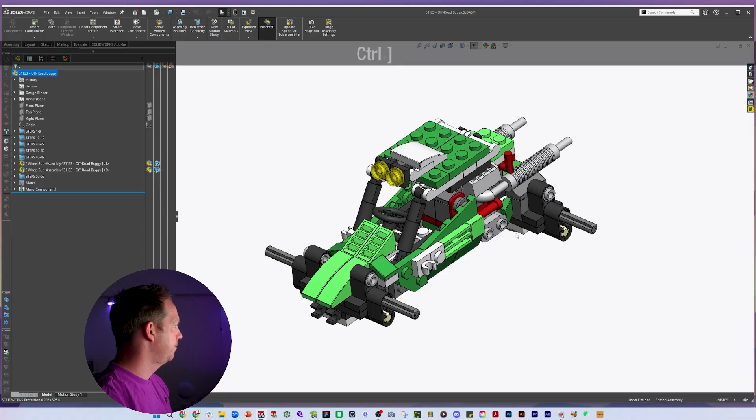We have a rear wing to build. The first one is a new part. So we've got this part here, and we're going to save that as a 1x6 instead of the 1x2.

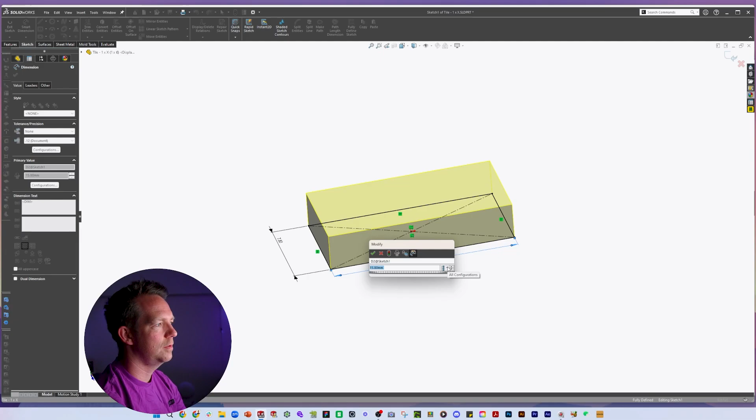Yeah, nice, that works. The only detail we need that we don't already have on this part is the little pinholes on the bottom. They are 3.2 with a slight hole on the inside, and they have spacing for 5 of them.

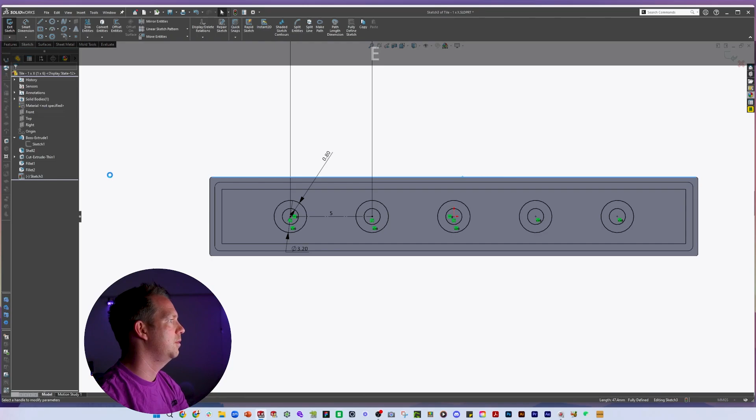We're not going to set up the full configuration for this part, just what we need. If we need to make different sizes of this tile, that's when we'll come back and change some configurations. For now, the 1x2 remains without dots, but the 1x6 does have them. And then that part's done.

We can introduce a 1x, and that has that current configuration there. That one's done. Next file.

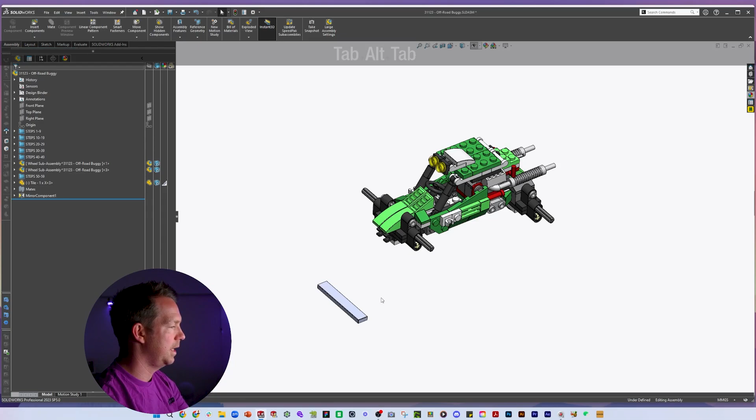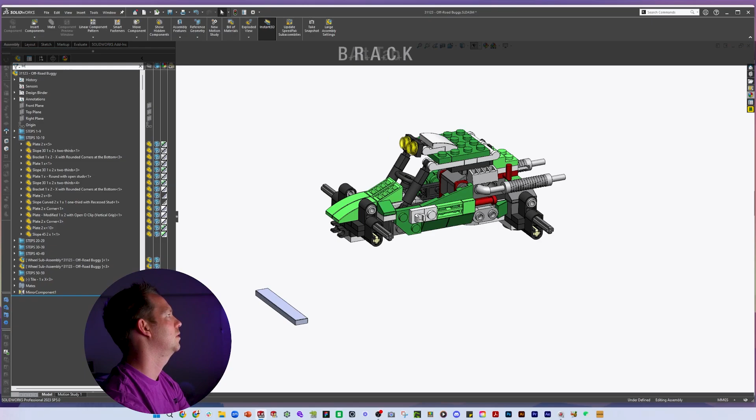Let's find it. Let's look at our parts list again - what was it called, bracket 1x2. We can use a filter and look at bracket to see what shows up, and these are the parts that we've made that are called brackets. The closest one we have is this one here.

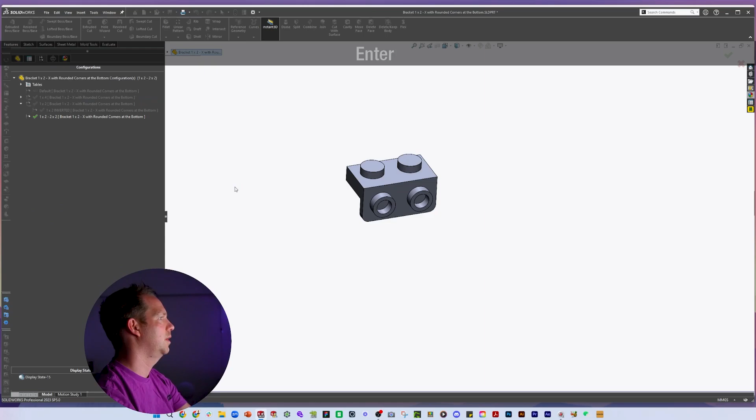So if we open that one up, this is a bracket 1x2 with a 2x2 configuration. We're going to add another configuration, 1x2-2x2, and go okay. This will be an interesting little modification.

So we will change this sketch to plus 7.8 for this size only. Now it retains the fillet, so there's no difference there, but these holes change as well.

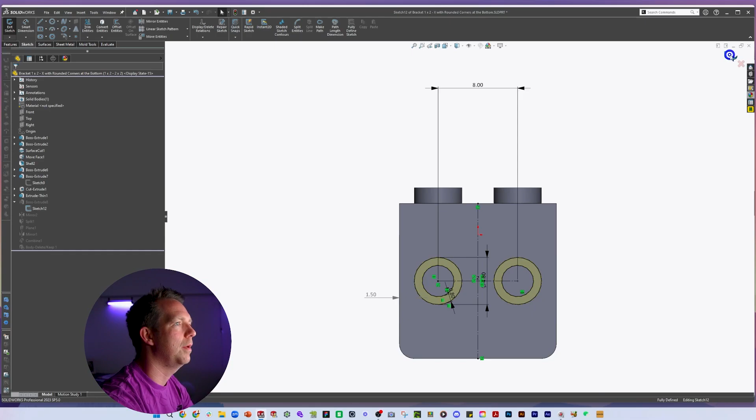Whereas before they were in the middle, I'm going to have to go back and fix that first in the original bracket. In this version here, we need to change these so they're no longer using the middle dimension like this - we actually have a dimension from the top for them, which is 4. That's fine, and the midpoint still remains vertical.

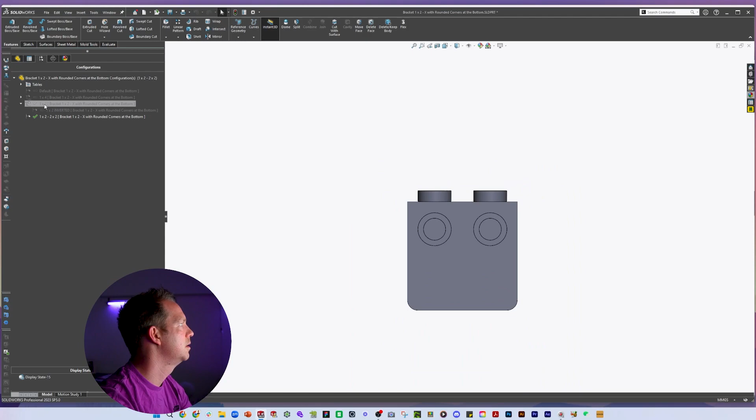So when we go to this one, they're in the same place. All we can do is a linear pattern coming down the edge with that 8mm gap. And then the part is done.

Another quick one. Good result. Errors - what's going on? We have to fix some errors. So, error on this one.

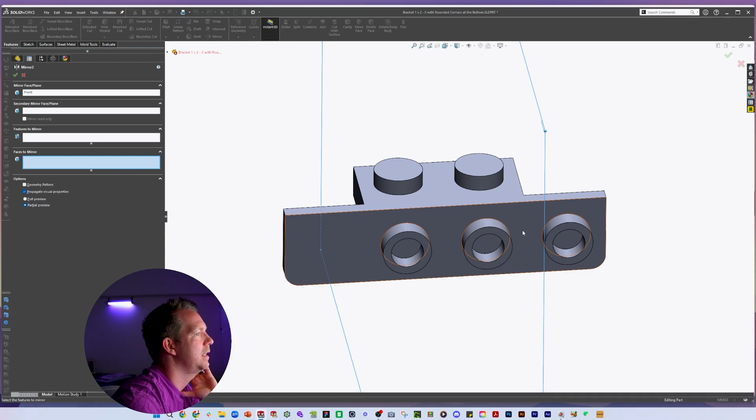Okay, this one has a pattern to it. We could do a mirror, and the faces we want to mirror are these ones. That should be okay - we still have errors. No, that's good, all right.

Exit isolate, and we can insert that part. Now, where was it - yeah, 1x2-2x2, there we go. And the assembly instruction is to put 2 of those long tiles down and put one of these on the end.

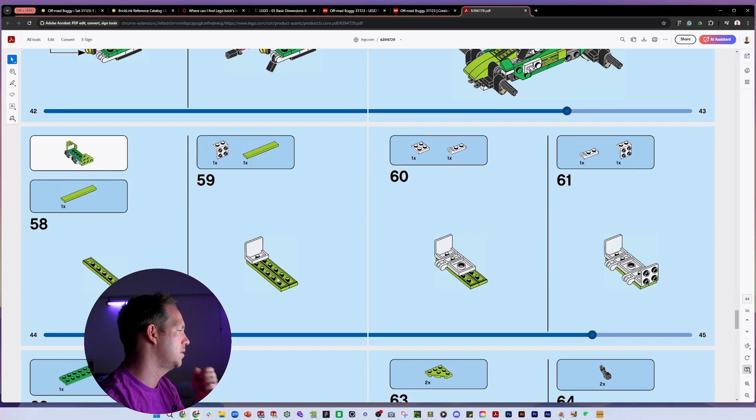Are they going upside down? No, they will flip back around. So let's keep them upright.

Let's do 2 of them like this, and then grab this and put it underneath. So it's going to join to that face, and these 2 faces will join together. These 2 will be aligned. I'm going to suggest that these faces will be together - these ones, and then this one.

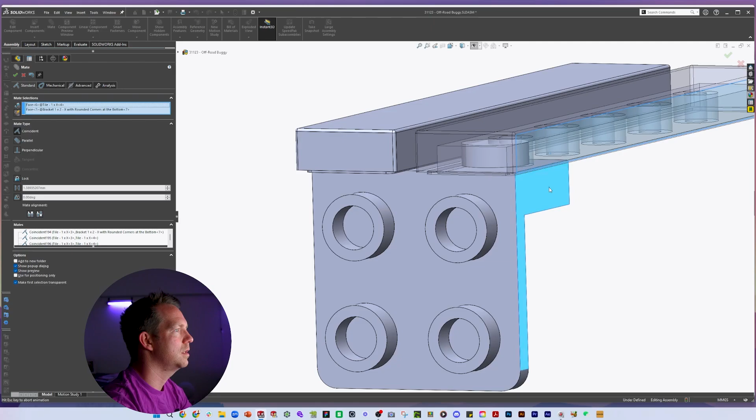Okay, next step, we're getting another one of those carriers in. So we've got these 2 down here, flat one there. Let's get out the rest of the parts.

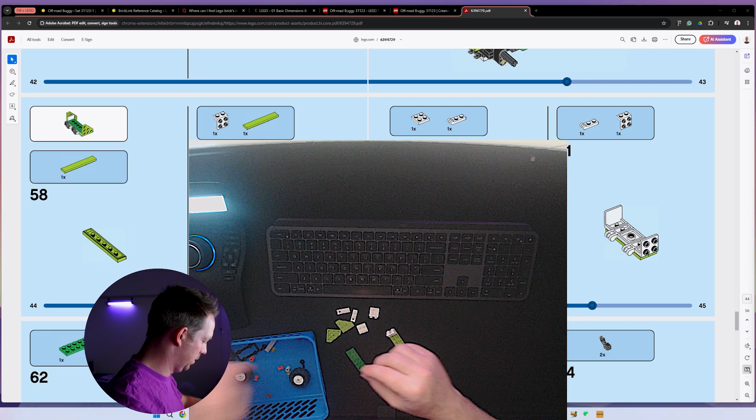So we've got one of those squares, 2 of these clip things, another one of these, long green one, 2 green corner ones, and then there's 2 black arms, which we'll do last. That's everything. Yeah, okay, they're all our parts.

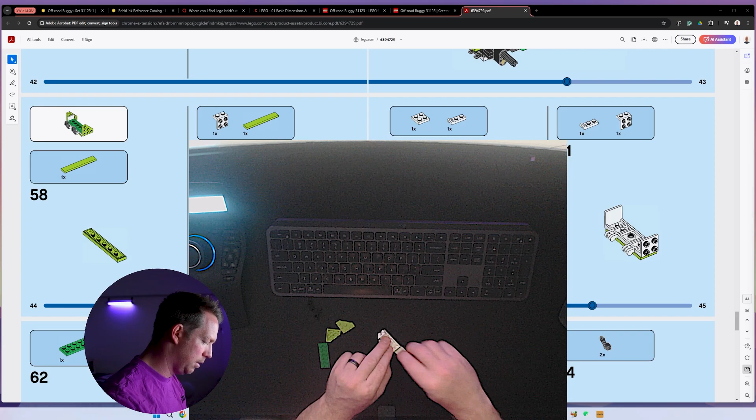So we've done step 59 and 60. I'm going to put one of those underneath, and then another 4 pieces in the middle. See another 2 of those underneath, and then we're mirroring the whole thing. I think we can use the mirror tool on this.

All right, so we've just been mating these parts here. I've got some of the parts aligned using the right plane. And we're going to use a distance mate between this face and this face, putting in the dimension of 0.2 millimeters to get those to line up.

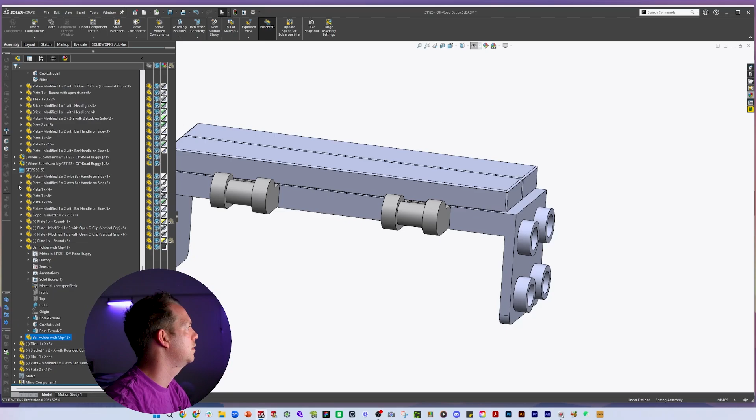And now most of that part is now actually fully defined. Just minimize these folders here. All right, so everything here is together, which is fantastic. We can move on to the next step, which is a long green one underneath.

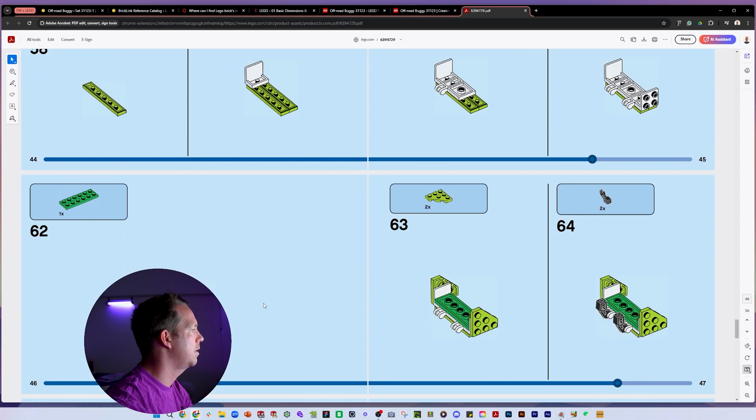So we'll grab this plate. We're going to turn it into a 2x6. I'm going to use a mate tool to make that face to the top. And then, unlike the other ones here, I can actually use these circles to align, and then the face, make sure that stays lined up. And you can see our spacing here is all looking pretty good.

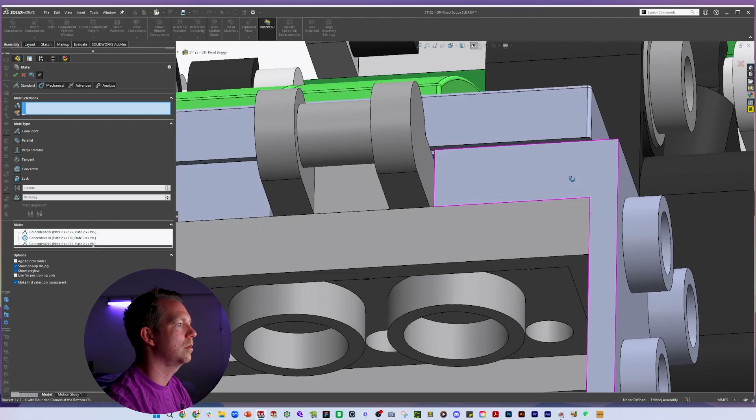Okay, another one done. All right, we're going to do these triangular parts on the sides. A line wedge plate 3x3 with a cut corner. Now, we've already done one part that's kind of like this on the sides, 4x2. And could we do a smaller one that has a corner cut? Yeah, I can see it here.

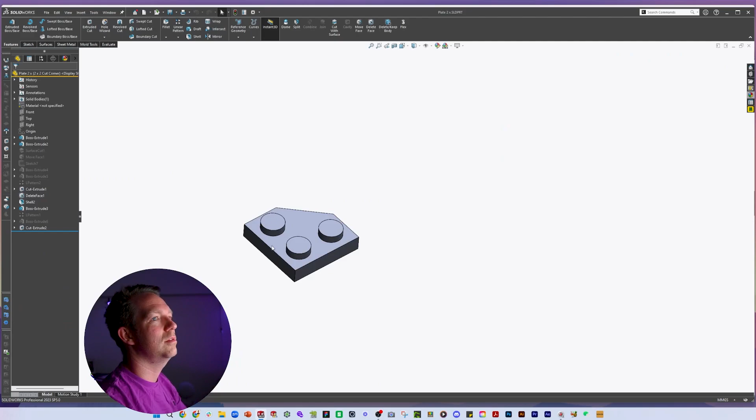This plate, 2x2 with a cut corner. Well, now we have a 3x3 with a cut corner. So why don't we use this 2x and change it into a 3x. Here we go. Save as. I'm going to save as a copy, save as a 3x, copy and open.

I'm going to have to rename a lot of the configurations. This one, for instance, is going to be 3x3 to the cut corner. All right, now it's the only cut corner 3x3 plate we're doing in this project, so we're not going to worry about the other configurations yet. We'll save them for another time.

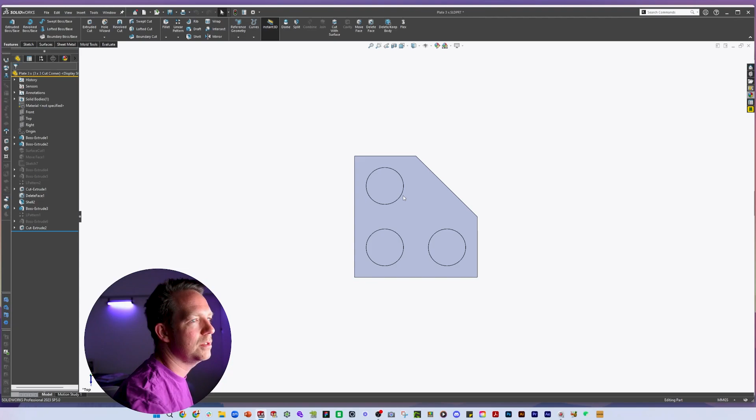However, it does mean that I'm going to want to change some things from the start. Firstly, this 15.8 is going to become 23.8. My dots on the top, the pattern of these is going to increase. We're going to not do a circular pattern. Can't do that. Instead, it will be a linear pattern in which we'll be going 8 across and 8 down

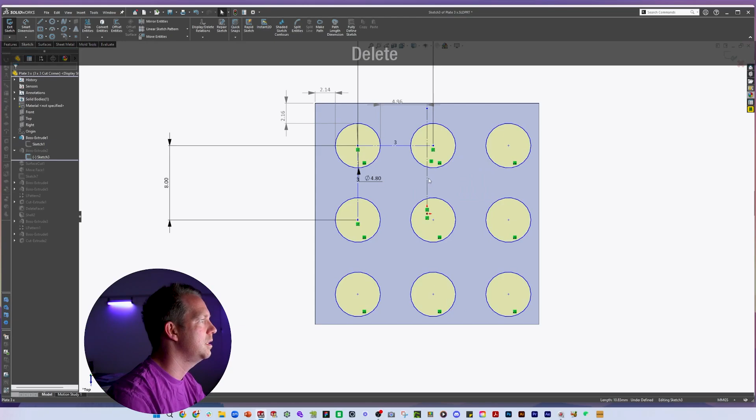with 3 instances, just like that. And what makes it very easy in this configuration is I can just drop the center one right on the middle. And then I need to make these fully defined, and that's done. There's my 3x3 plate. Now let's get to the cut corner.

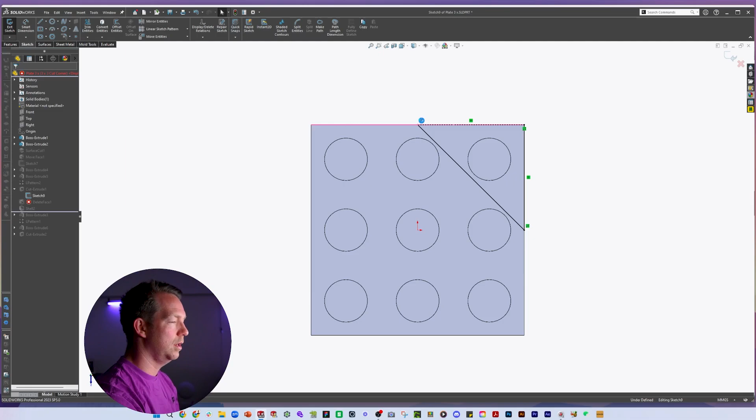The cut corner on this occurs what looks like halfway between these two lines. So it's not in the midpoint. Change that, these two do remain equal. The distance is more like this. We can measure to check. It's pretty close to 7.8 millimeters, which should be, yeah, right in the middle.

What is right in the middle? Let's find out. It's going to be 8 millimeters, 7.9. Okay, that is our cut corner. We're going to delete face on these two. The shell has been completed on the bottom.

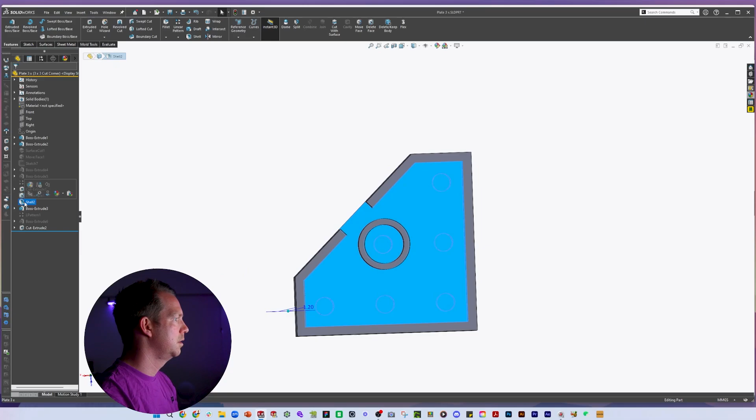Now, instead of one hole, we do have three of these, and they're actually in different locations. So again, this one's kind of easier because we can use like a center point between these two to find where this one needs to go. And then we can use this to do a linear pattern, the same as before. Then we can skip this instance on that side.

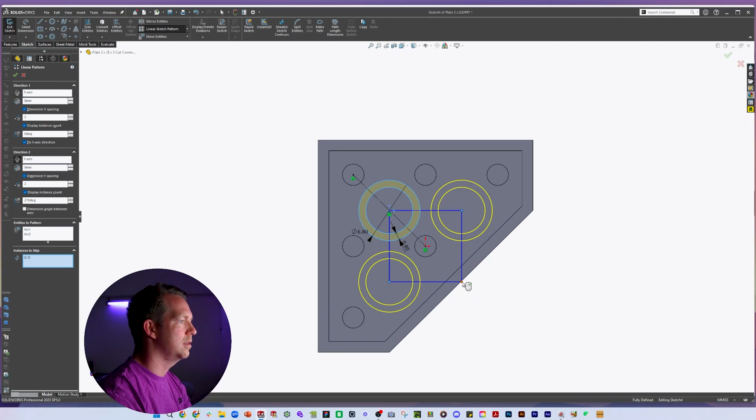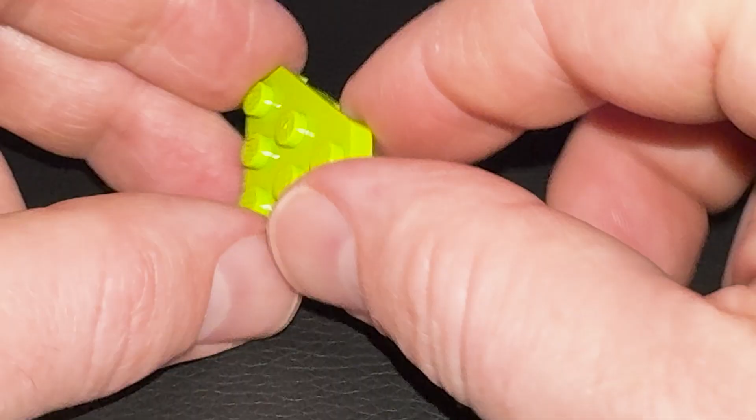All right, now one difference that this version has, it has a small rib in between the parts. So I'll show you in the video here. You can see the 3x3 where it's cut at the top on the underside. There's 2 gaps, 3 of those larger holes, but they're joined with a small rib in the middle. That small rib being the same thickness of the other plastic, which is about 0.8. So we can put that in, not a hole, we'll put that in with just a line between them.

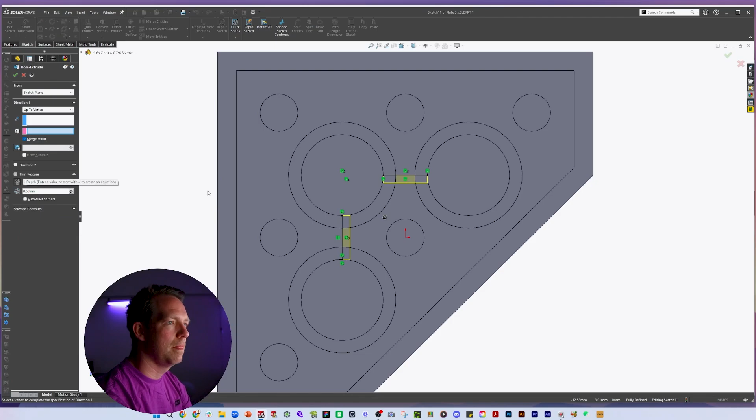So one line there and one line there. Now, when I use that, just a line without doing a full shape, I'm using what's called a thin feature, which means you can set a direction one way or the other or both, and then the extrude works in much the same way. Okay, so we get that detail.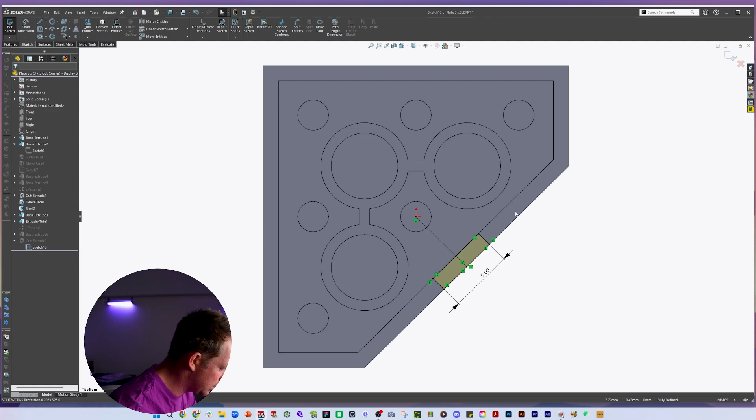Then we come here, we're going to do the cut to remove some material. In this case, there are 2 gaps that we're creating, which are 5 millimeters, and they are 5.2 apart. So what I'm going to do is move this to here, change what's lining this up. We want to use the center point of that, and we want to make this line perpendicular with this one, and that should give us the correct location for that cut.

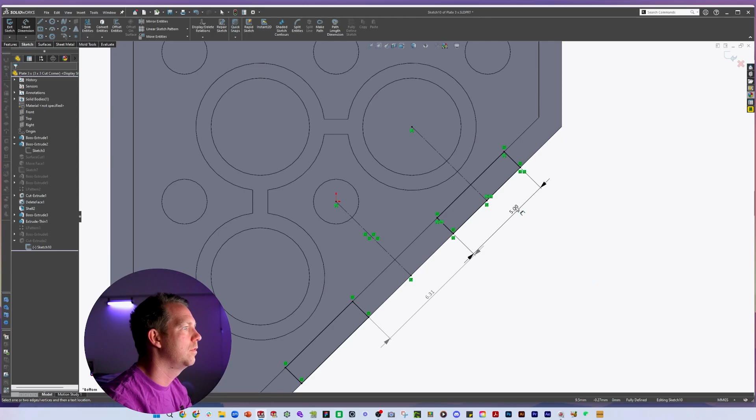Once we've done it in one position, we can just use the existing geometry in a construction line to work out the second one. And then just to double check, I'm going to check the dimension in between. It's actually not that much. So this might be bigger. Still not that much, 5 millimeters and 6.2 apart. In fact, 5.2 it is. All right, so it's going to cut that.

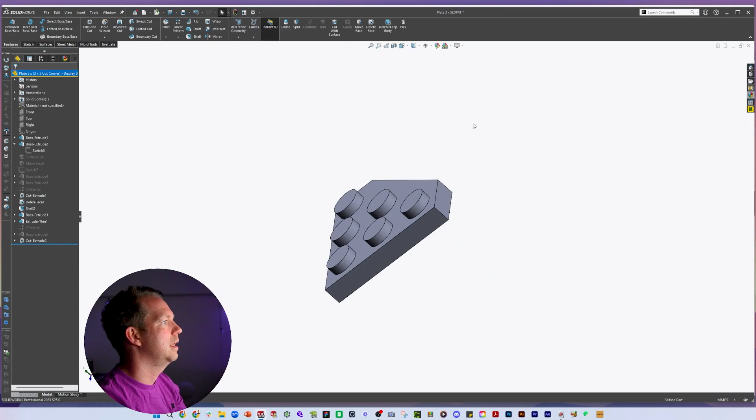And the last detail is there is one more of these. Just going to draw it here, make that perpendicular and give it a dimension, which is 3. All right, that looks great, and that's another part done. Let's bring it in, and let's chuck them on the assembly.

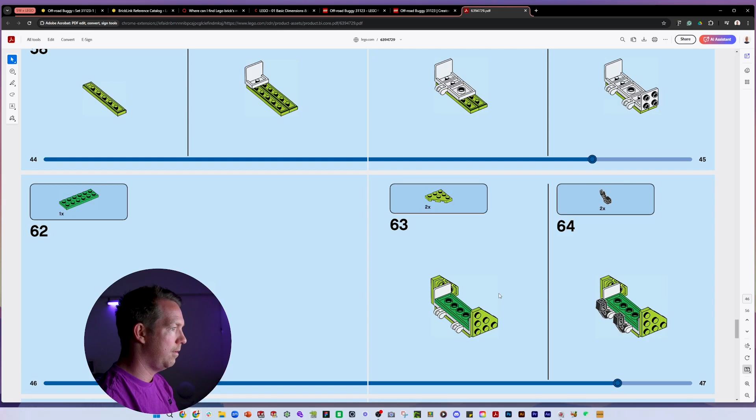So if we flipped it upside down, they'd be pointing up. So the right way around, they'll be pointing down with the square part at the front. Okay, so we'll grab this one, make a couple of faces, and then use our circles to line it up. So mirror that, and we have one more part to go for that little sub-assembly.

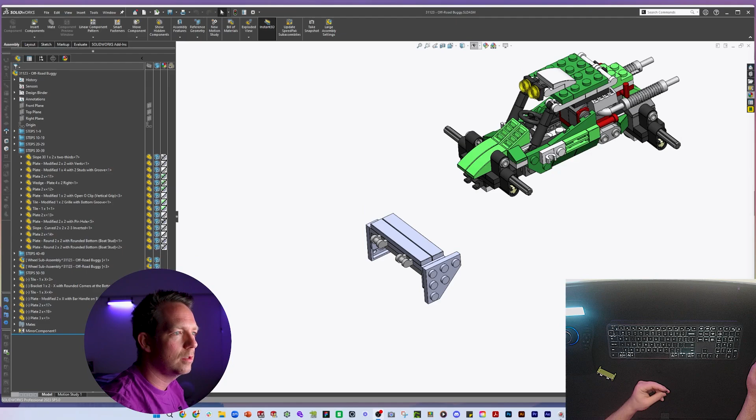Okay, this last part, this little bit here that we're about to do, quite small. Once again, I'll show on the camera. It's kind of got a few odd angles as well. It does have a little claw, hole on the bottom, and some cuts on the sides. What we're looking at is this black one here, a black mechanical exoforce bionicle thick support. Okay, so let's get into it.

I think this is a kind of part that you're starting from scratch. Yeah, there's nothing here that really links it to other Lego parts. It does look a bit odd. It's interesting that you can see the little pips, little bits of plastic on the inside here. You can see them particularly in this model. Those will help to grip stuff if it's fit through there. I'm not sure what kind of part would fit in, but they must allow for something. So let's get into it.

We do have a good reference model here. Gives an idea of how to build it, so we can start from that. I think we'll build it with this face at the bottom being like the top plane. It's a bit annoying that it keeps rotating like that. So some of these photos, so let's just get straight into it. So new part, top plane, and we'll start with that bottom sketch.

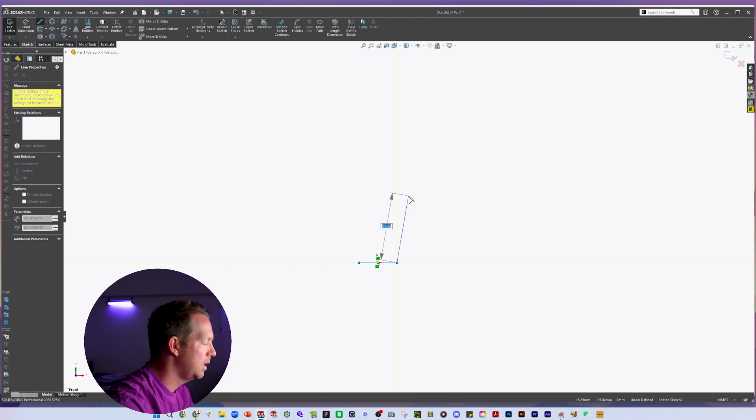Now the bottom sketch actually starts as a square, but it extrudes up at an angle. So instead we will do the sketch on a front plane, and I'll keep it in the middle. It kind of goes up like this, and that's out one side, out, down. Not a very symmetrical part at all. Measuring it's going to be challenging to get super accurate.

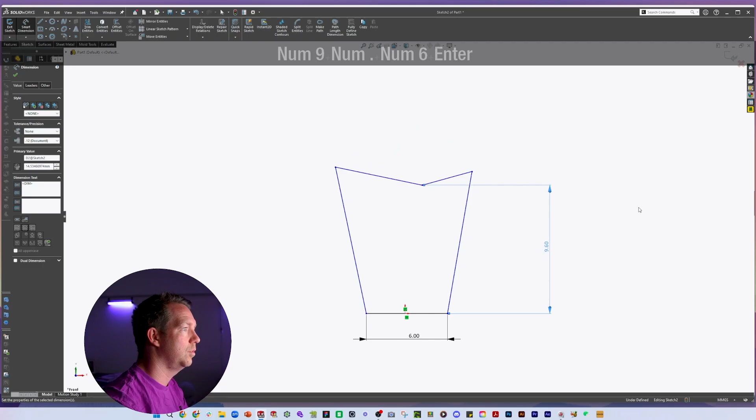We'll just use the kind of info that we've worked on previously, 6 for the width at the bottom. And I'm just starting with this bottom section here, so like 9.4, 9.6 for that. At its widest, it goes up to like 6.8. It's not that big, but it is a little bit bigger at the top. Neither of these faces is straight, but perhaps they're at the same angle.

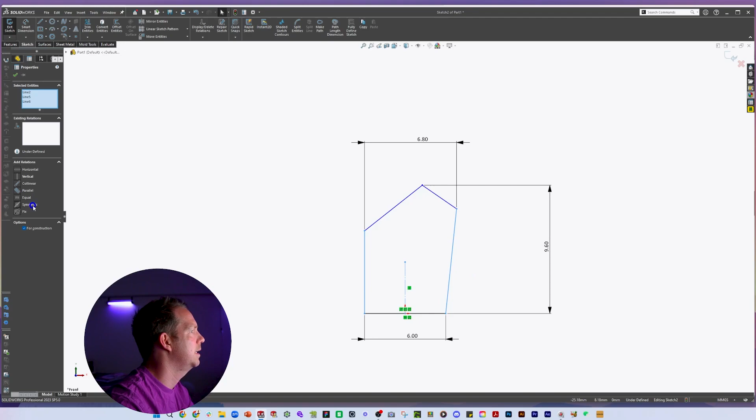Now, what that means is if I put this in the middle and I put another construction line in the middle, there's potential for me to select those two and make them symmetric. And that doesn't mean they need to be symmetric in length, but they will in angle, and that just helps balance out that shape. So then at the top, I can say, again, it's hard to measure here, but let's say it's off to one side.

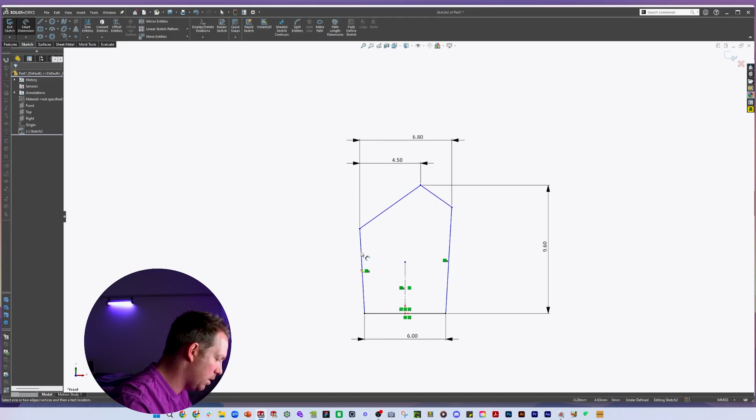Looks like it's about 4.5 from this edge, okay so that helps with that dimension. I can see that's a little bit funny there. Maybe I can measure that length of the flat section at the back - about 7.4, oh it's longer on this side. It looks longer, yeah that's about right. If I move around, I can see there's still some stuff happening.

Let's just measure that front flat section as well - 7 point something, can't be the same. Or can it be the same? They can be the same. Why not? These two here, horizontal. There we go, it's our shape.

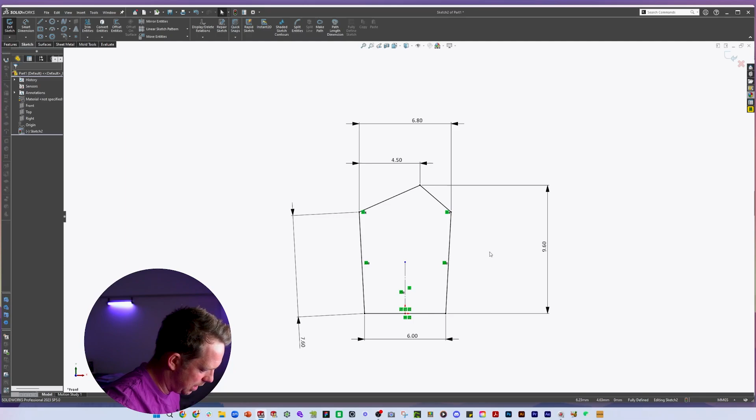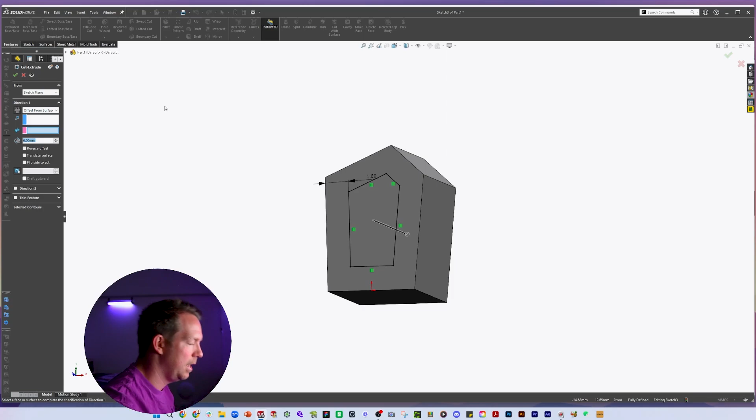Now is extrude, straight out 6 millimeters, so that's going to be mid plane. Then there's an offset face, and say it's about 1.6. So we'll select this face, offset 1.6, the inside, yeah 1.6. I'm going to extrude cut that down a very small amount, 0.5 of a millimeter in line, and we're going to mirror that to the other side, using the front plane to do that.

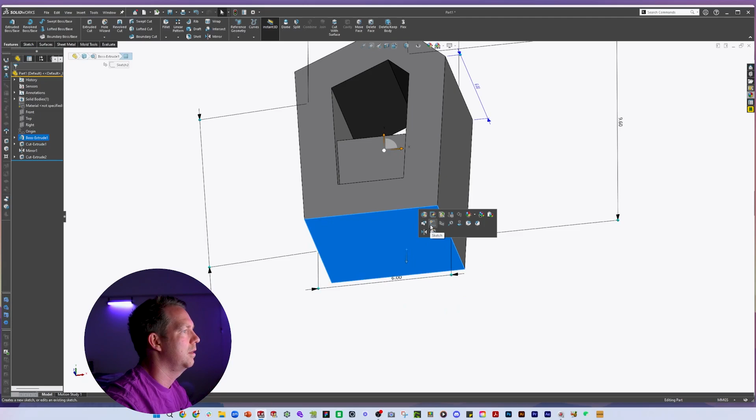All right, while we're here, let's save the part - horrible name - and continue on. It's really just the arm on top now, but it's just an awkward shape. I say awkward shape, it's awkward to measure. It's not symmetrical, there's no... at least it's flat. It's at a weird angle.

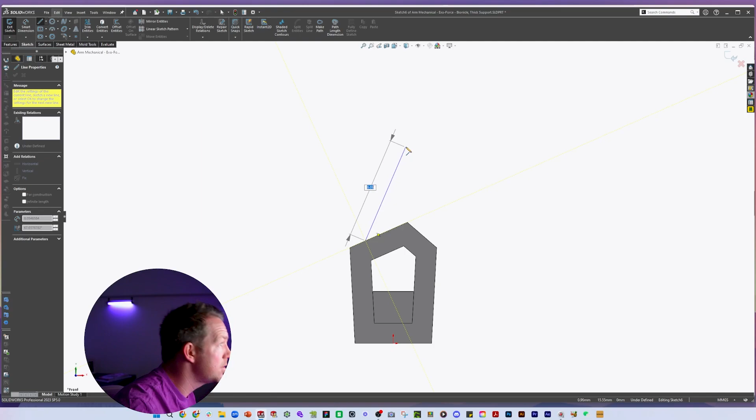Just makes things awkward, we'll just do our best though to guess. We can see that there's a couple of flat faces here, so hopefully that kind of helps. What I'm doing is I'm just sketching, and we'll look at the part, and we'll just put it in for a photo - come on, there we go. Okay, it's got some round.

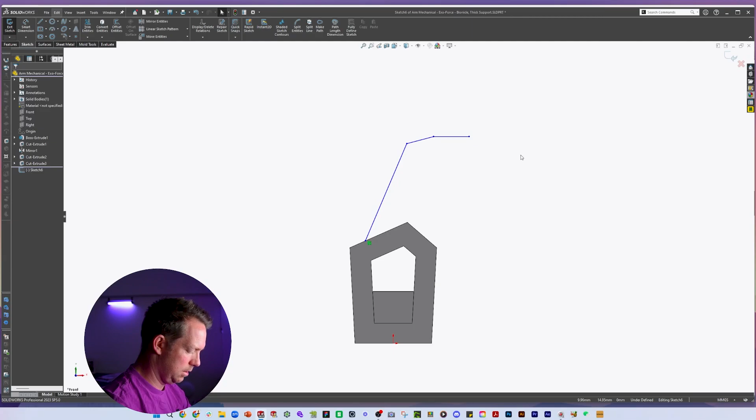I'm just going to leave it there while it's like a magnifying glass, so I know what I'm looking at right here. Okay, so it's got a straight section up, it's got another angle, and then another line here. Inside this is an arc with what looks like another flat, down, and then 2 flats to join the whole thing. So let's put some dimensions to it. The whole thing, the top face, maybe it will be flat, which is good.

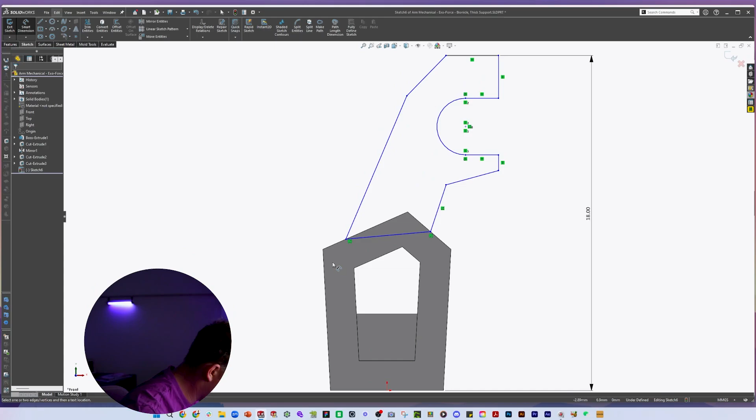18 millimeters, this one here, so there to there, 18. Now this one actually comes pretty much all the way to that edge. In fact, I'm going to put it on that edge. It looks like it's there. So that locks in that point.

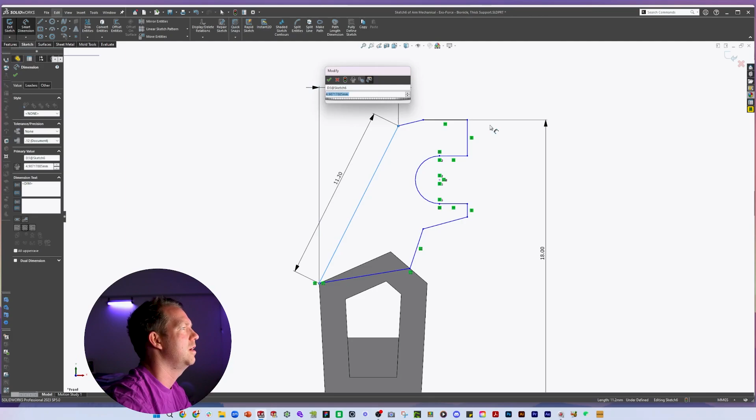If I measure that flat face, the rear is 11.2. I'll just bring that around and down. That's going to work. I can't measure an angle, I can try and guess a horizontal distance, how far it moves, which is about 5, and that helps. And then I could say these two faces here, let's say they're equal.

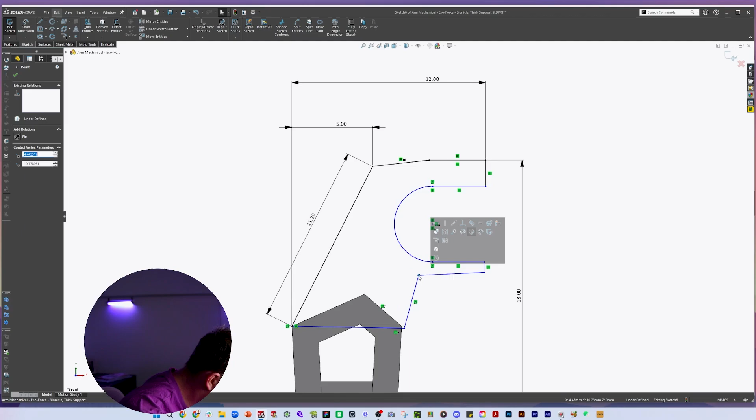It kind of helps, but I actually want full width of this thing, which is 12 millimeters. So from here to here, it's going to be 12. Oh, it doesn't look right, but it is - it's correct. Okay, that means we just need to readjust some of these other segments that we've sketched, which are probably out of position. So the one on this edge here, let's say it's a millimeter from a corner. Can I use the corner? Does it want to let me?

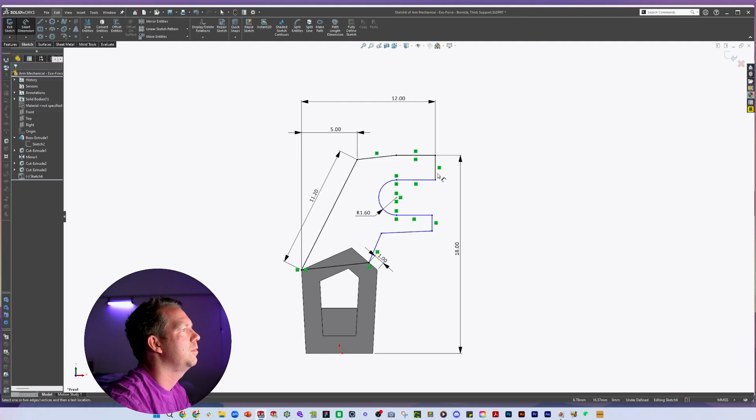Sometimes it can help to just turn on a sketch, that way I can see that sketch and select it. Now the grabbing section, that's the usual 3 millimeters - so that's way too big. Let's make it 3.2, put that down there. From the end, we've got 3.2 millimeters. Yeah, so I'm well off with some of those details.

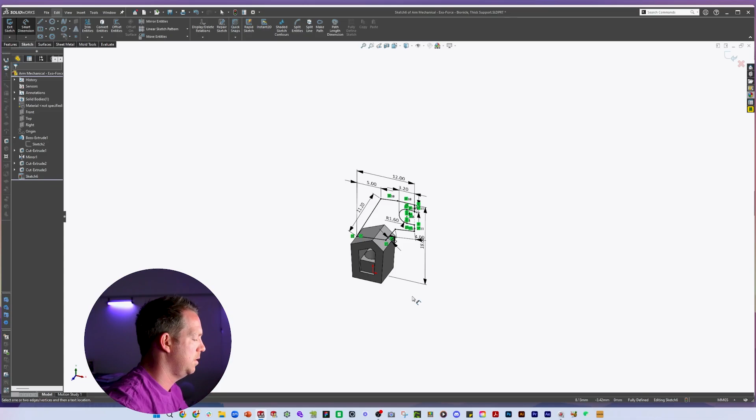1.5. All right, it's starting to get close to fully defined now, and it's starting to look okay. Let's say that these two are in line, so they're collinear and equal, and then all I've got left to do is this one here, and let's give it a dimension of 4. Okay, done. The width of this is 3.2 millimeters. Mid plane is already selected. Press OK, the detail's done.

Now it does have a recessed area, and you can see that inside. Put that in — that's what removes a lot of material. It's got a bit of a chamfer and fillet to it as well, about 1.5 millimeters.

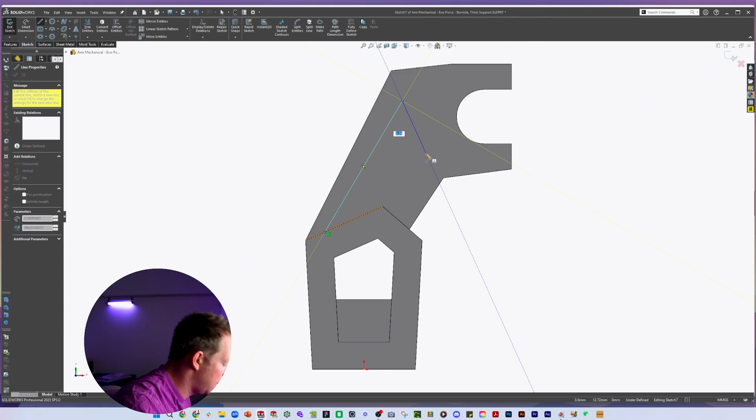So we're going to go like this — straight down, cut in, up, down, and add some dimensions. Parallel, set about 1.5, same on this side, make it parallel, 1.5. And the line that's going up, there it is, in line with this point.

And then there's a fillet up, and there's a fillet in these here and here. Bigger, so that's more like 0.8.

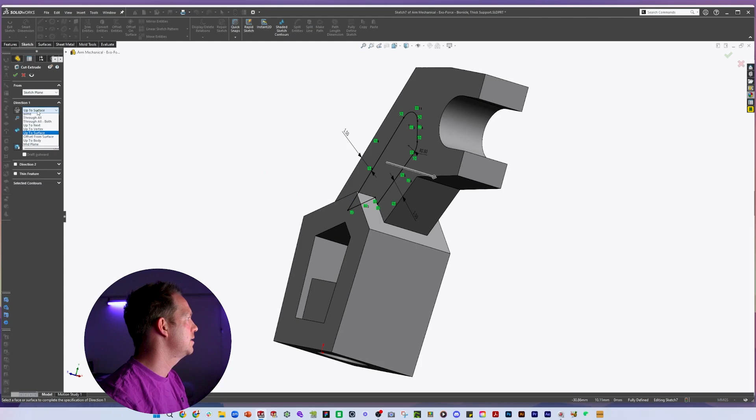Now it is cut on both sides. Where's our mirror? It's here. Let's edit that mirror to include that detail. Very nice, all right, that is done — that is enough detail for that part.

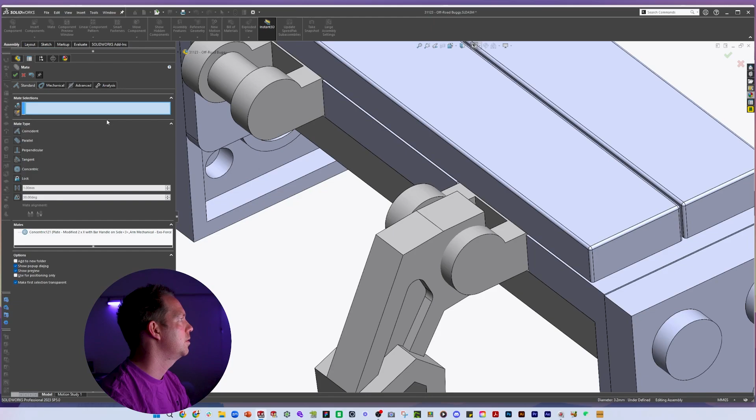We're going to save it, go to the assembly, and see where it's fitting on — it's clicking onto the front. So I'm going to insert the component, bring it in here, give it a mate, and do what we did previously with the width mates: select 4 faces, outside, outside, inside, inside, and then mate.

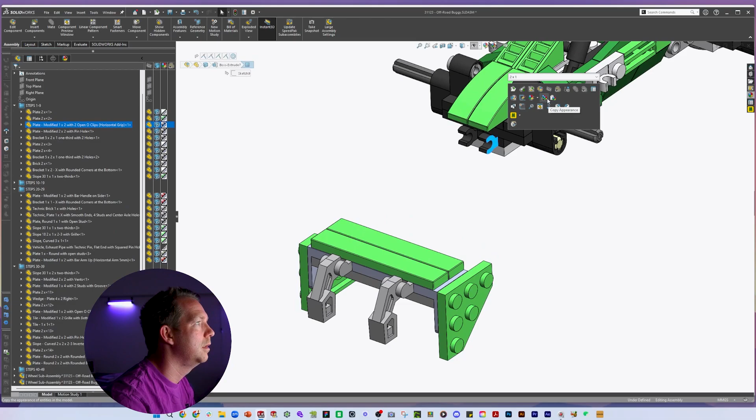Okay, that's done. Mirror component, and let's add our materials. So we have some lime green parts that will go to this one and to the outsides. We have its black part, which is this one. Then we have some white, which is everything else. Sorry, there's a dark green on the inside. This one's white, this one's white, and dark green — copy and apply.

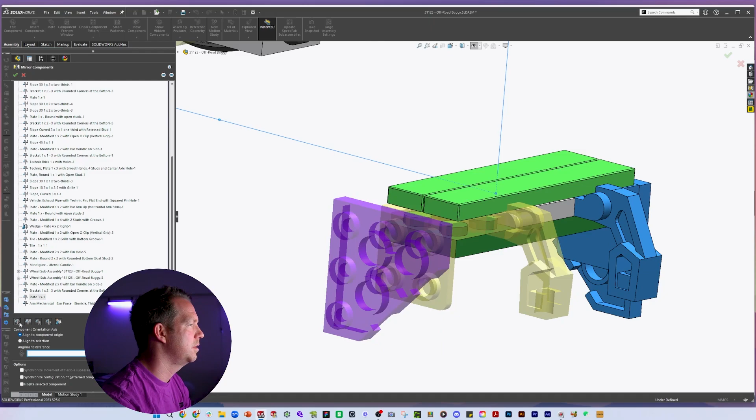Excellent. Now, we notice in our mates, if they're mirroring, that one hasn't worked. Let's identify it — it's that plate. Where we go to the next screen we see plate 3x1 down the bottom. We can just flip it around, but I'm going to assume we're not going to find the right version, so I'm going to remove it from the mirror components and just put one in manually.

Grab it, put it over here, flip it around — what do we want to do? We want to put top plane to top plane, and then front to front. Nice, all right, where does this whole thing go? On those red pegs at the back.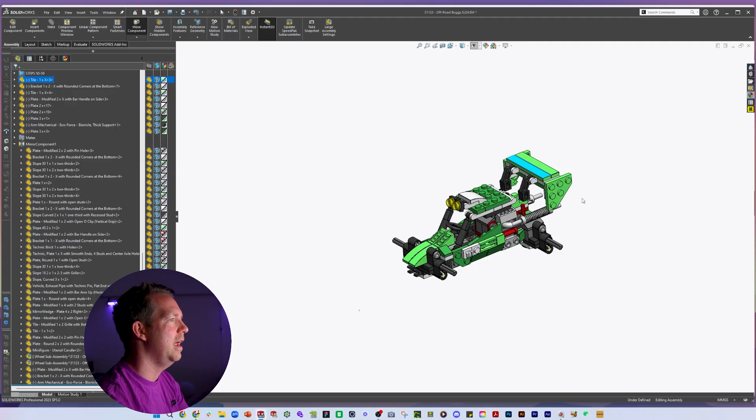All right, so we'll find out if our mates once again line up. Looking at these here, we can see that the center line between this part and this part is 24 millimeters. Now this hole to this hole — look at that, 24 millimeters. So this should actually work first time.

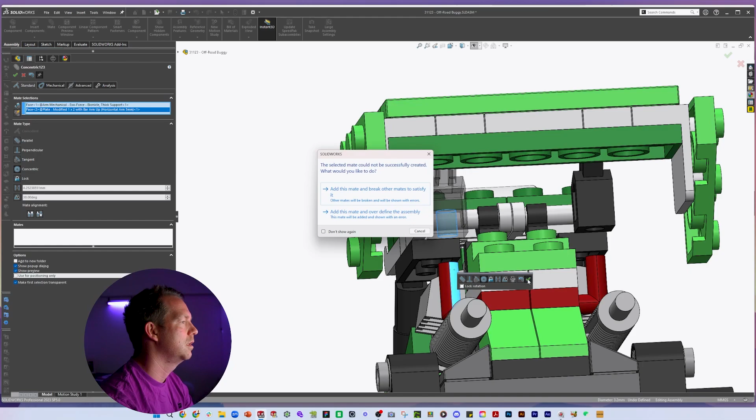When I select that face and this face, concentric, I'm getting an error. Let's over-define the assembly and see what happens. What's causing it, I wonder. Now what I'm looking for in my mates here is — well, let's try some things, hey?

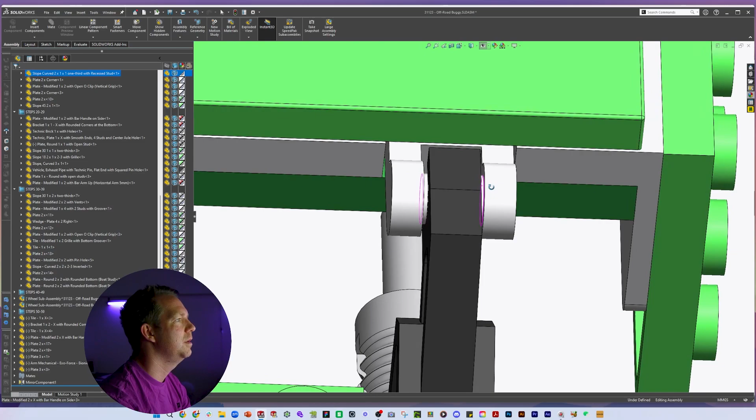This mate that we just added before, the width mate, why don't we change that to be free with constraints? Press OK, and we do that, and our error's gone. It's just giving it a little bit of room to move, maybe to one side, so it can now be in line with this. And that's perfect.

Now let's see what it looks like when it fits on. I'm not sure if those poke all the way through or not — a little bit fiddly. Now I'll show you what I'm doing here, just trying to get this section on, those two red ones. Quite fiddly, have to line them both up at the same time, and then just push down.

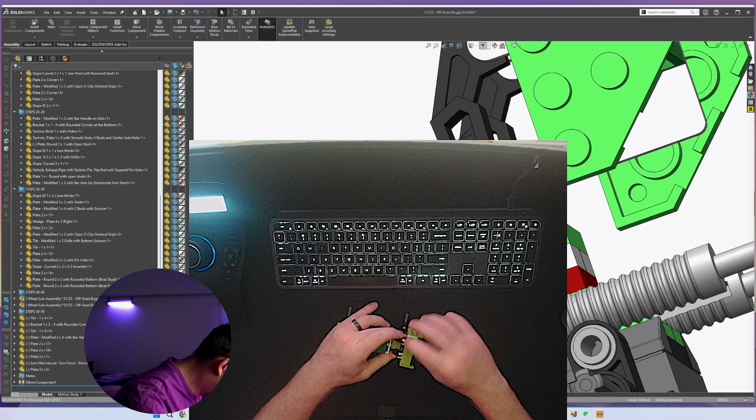Okay, they're on, and I can see it actually go all the way through — you can see that little red dot there, they're pushing through. All right, we've got that mated on, we just moved up to that face. And check out this — that moves. Awesome. Saves. This is looking really cool.

Really happy with how this is coming along. We are up to — we're on the home stretch, would you believe?